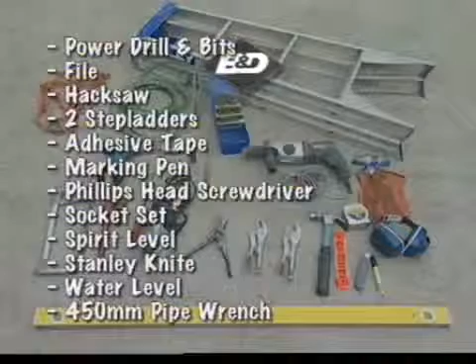Before you start, you should make sure you have the correct tools to complete the installation. You will need a power drill and bits, a file, hacksaw, 2-step ladders, adhesive tape, marking pen, tape measure, Phillips head screwdriver, a socket set, spirit level, Stanley knife, water level and 450mm pipe wrench.

B&D roller doors are designed to be mounted behind the opening. Therefore, you'll need to measure and check the opening width, opening height, side room and headroom. You'll also need to check that the opening is level and plumb and that it is structurally suitable.

The door will fit any opening height up to the marked door size. A door cannot be installed higher than its maximum size. However, it can be installed in a lower position, providing the door guides are cut to size. If the opening is too high, the door should be installed at the maximum door height position and the opening reduced. As the door overlaps each side by 25mm or more, the door should be 50mm wider than the opening.

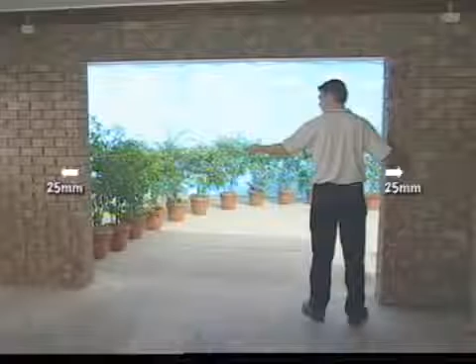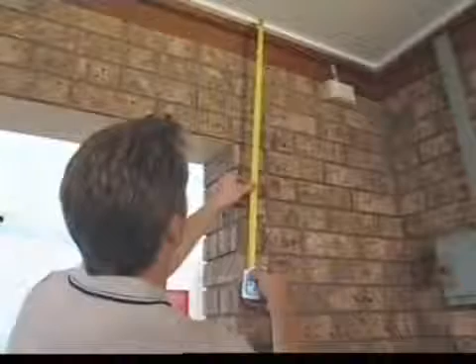A wider door can be fitted as long as additional side room and fixing is available. If the door is too narrow, the opening should be reduced by fitting jambs to the inside of the opening. The door is supported on brackets above the opening at each end and requires headroom for the door to roll up in. You should refer to your instructions for headroom requirements. Consequently, piers or doorposts must continue up past the top of the opening to provide fixing for the support brackets.

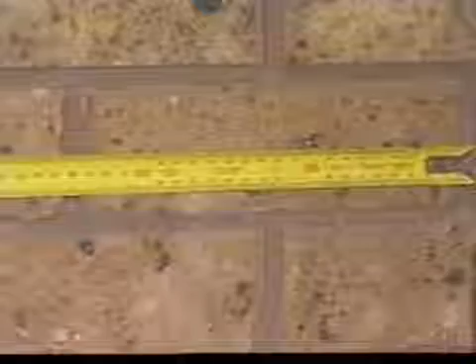A minimum of 75mm of side room is required behind the opening and should extend above the head to allow for bracket fixing. 100mm is desirable. Side room on one side of 115mm is required if a B&D Controll-A-Door garage door opener is to be fitted now or in the future.

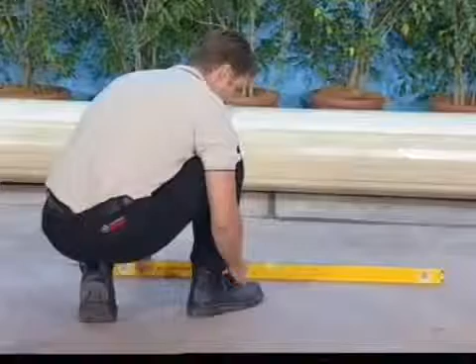The door must be installed in an absolutely level condition. If the opening is not level and square, appearances and/or side room requirements will be affected. Where jambs are out of plumb, extra side room or opening modifications may be required to allow the door guides to stand back from the opening edge. The floor should be level or recessed across the opening to avoid gaps. If the floor is not level, contact B&D for taper panel options.

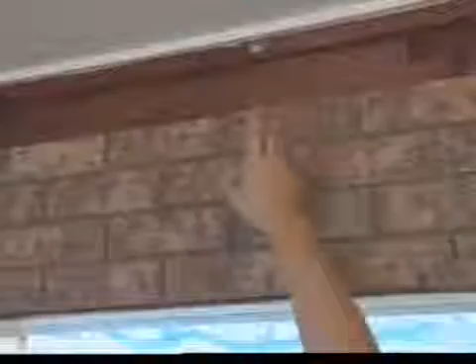Ensure the opening is strong enough to support the door. Ensure that the surface where the door will be fitted is flush and smooth and the area behind the opening is free from any protrusions. Do not unwrap the door roll at this stage.

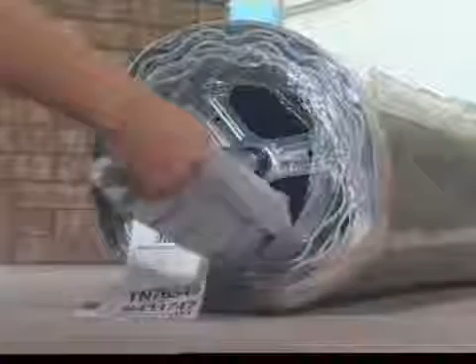Your B&D door will come delivered with identification tags and protective packaging. Remove the brackets, guides and bag of small parts from each end of the door. Make sure that you have been delivered all the correct parts. You should have a rolled plastic wrap door, A-style brackets, left and right-handed, door guides, left and right-handed, steel locking bars and a small parts bag. You should check the contents of your small parts bag against the parts list in your installation manual.

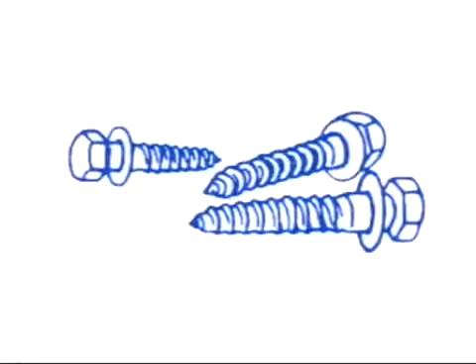The standard fixings that come supplied with B&D rolling overhead doors are coach screws for attachments to timberwork. Remember, it is the installer's responsibility to ensure that the fixing method is sound. When deciding the fixing method, dynamic loads on door brackets as well as the door weight must be considered.

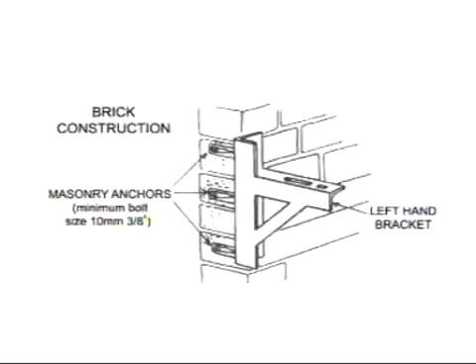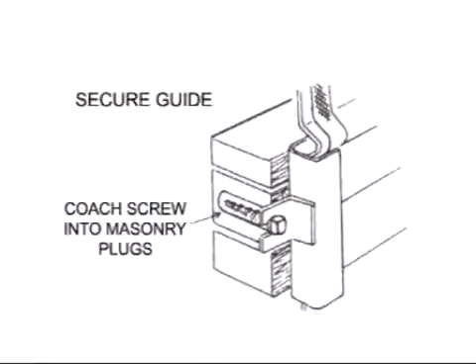For brackets, B&D recommends you use 10mm minimum bolt size masonry anchors, Dynabolts or similar. For the door guides, B&D recommend that you use the 40 by 8mm coach screws supplied with a good plastic masonry plug or suitable masonry anchors.

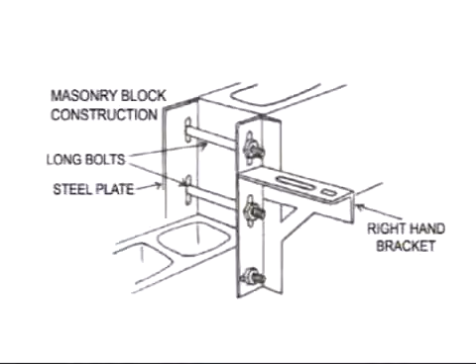Masonry blockwork should be properly filled and reinforced if brackets are to be mounted directly to blockwork with masonry anchors. Where the blockwork is not solidly filled but structurally sound, long bolts should be passed through the blockwork using suitable steel plates under bolt heads. Special consideration should be given to brick type and construction of wall to ensure satisfactory fixing. For example, welding detail if fixing to steel.

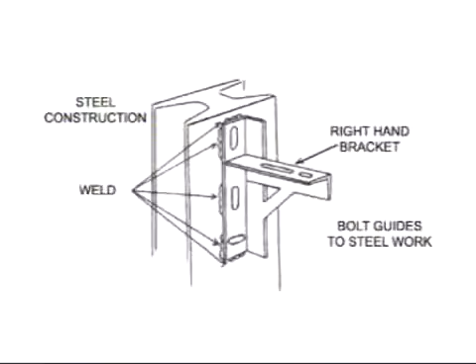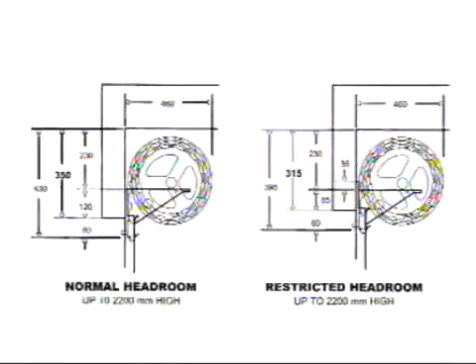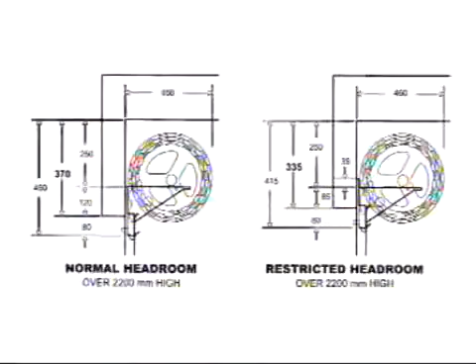To install the brackets, you must determine your headroom requirements. For doors up to 2,200 mils high, standard headroom is 350 mils, restricted headroom is 315 mils. For doors over 2,200 mils high, standard headroom is 370 mils and restricted headroom 335 mils. This installation will be for standard headroom.

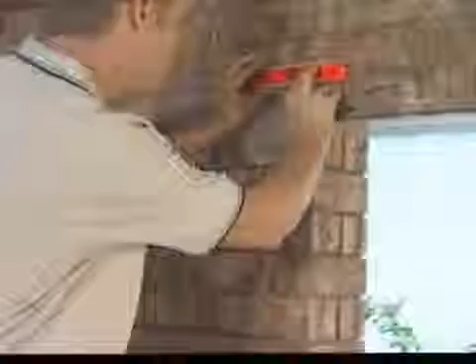Measure up 120 mils from the underside of the head. If the head is not level, measure up from the lower side first. Using a level, mark a straight horizontal line. If you have restricted headroom, measure down 230 mils from the roof or lower substructure, or 250 mils if the door is over 2,200 mils high, to the top of the bracket. The bracket should be between 85 and 100 mils up from the lintel.

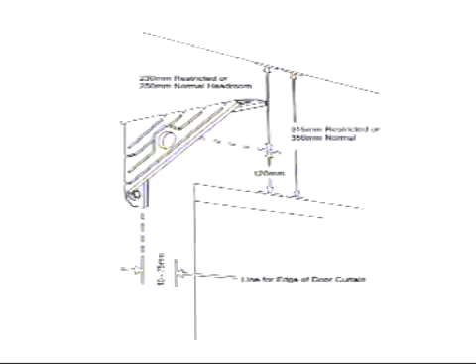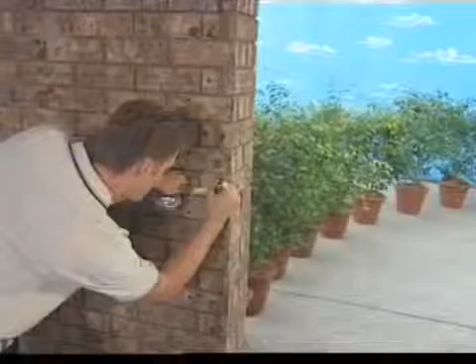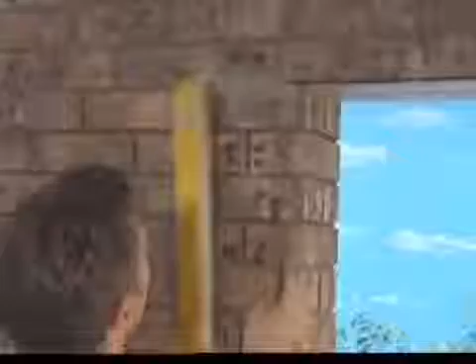Measure the door and opening widths to determine the amount of door overlap to enable correct positioning of the brackets. Add a clearance of 10 to 15 mils from the edge of the curtain to the inside edge of the brackets to determine positioning of the bracket. Mark two hole positions using top and bottom slots of the bracket. Drill both holes, ensuring that you use appropriate safety wear.

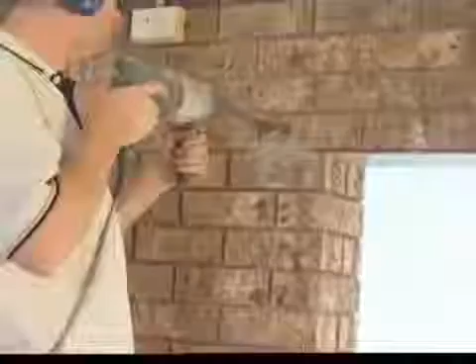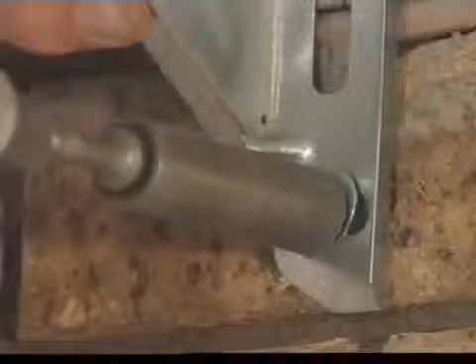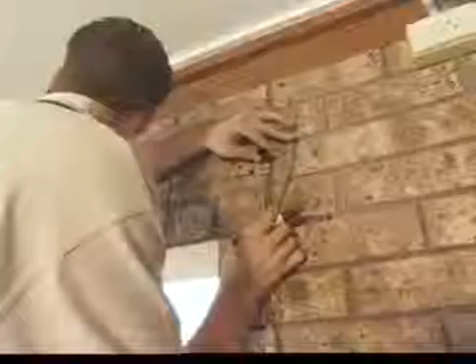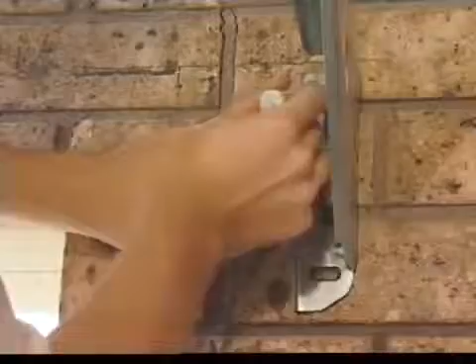Attach the bracket using the 50 by 10 mil coach screws and washers supplied, or masonry anchors if fixing to brickwork. Check that it is level. Now that the first bracket is in place, the second bracket is ready to go up. Using a water level, mark the position for the second bracket. Ensure that the brackets are perfectly level for the door to operate correctly. Recheck levels and then drill and fix as you did with the first bracket.

If the headroom is less than 250 mils, a false head should be fitted to improve the external appearance of the garage opening. Note that the false head must not be installed too close to the curtain face. B&D head infill panels are available to match or contrast with your doors.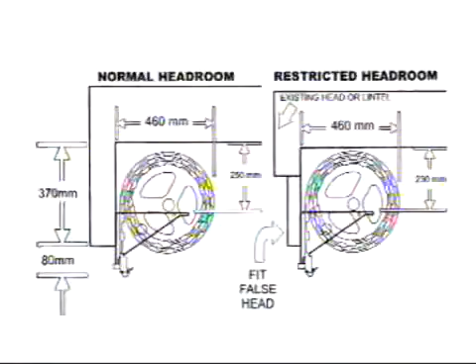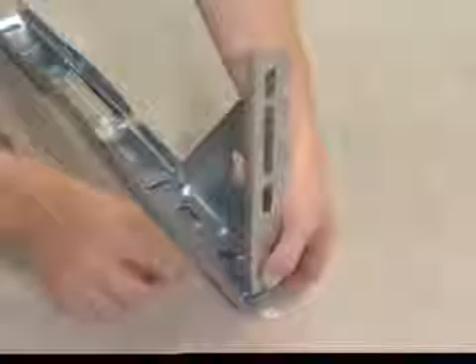An A2 extended leg bracket should be used in conjunction with the standard A-style bracket under the following circumstances. If the brickwork is old or in any way suspect, where old brickwork with lime mortar is encountered, or any doubt exists as to the holding power of the masonry work, a timber frame, which continues above the head for bracket fixing, should be fitted on the back surface of the opening. If floater bricks are present, but sound fixing lower down the brickwork is available. When fixing to honeycomb or semi-hollow bricks. When an RSJ interferes with the bracket.

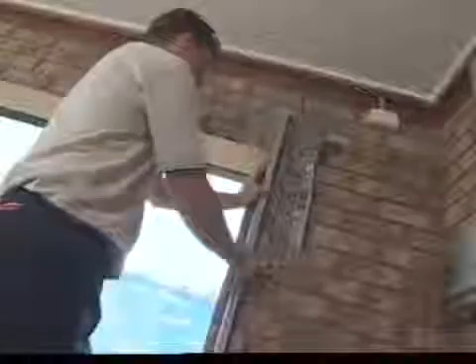When fixing brackets to timber, the heavier coach screws supplied are usually adequate; in some cases, especially where timber is very soft, old or insecure, coach bolts should be used. Check that the guides are the correct length. They must be level with the brackets or, in the restricted headroom position, 35 mils max above the brackets. If the guides are too long, they will need to be cut to the correct length. An angle grinder can be used to do this.